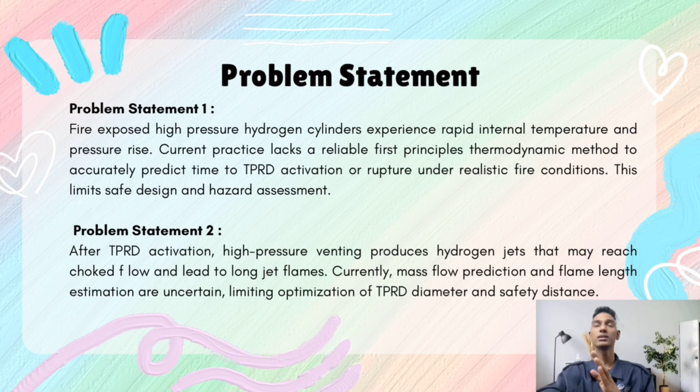After TPRD activation, hydrogen is released at high pressure, forming high velocity jets that may reach choked flow condition and produce long jet flames. At present, mass flow rate and flame length predictions are uncertain, limiting optimization of TPRD outlet size and also safety distance.

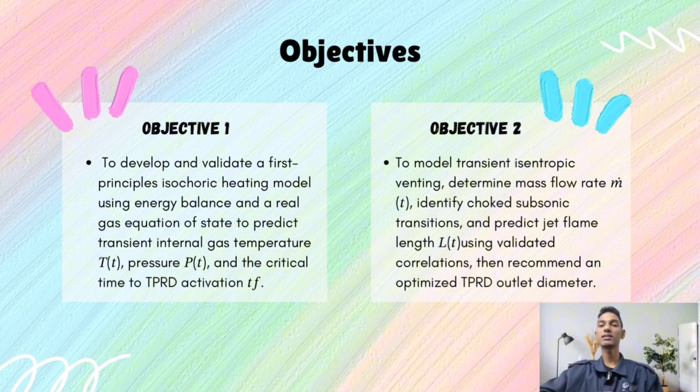Okay, now we move to the objective. This study has two main objectives. First, to develop and validate a first principle isochoric heating model using energy balance and also a real gas equation of state to predict temperature, pressure and also the time to TPRD activation.

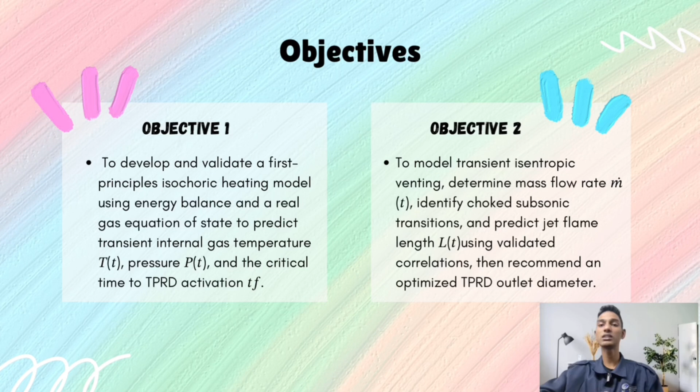The second is to model post TPRD venting as transient isentropic real gas flow in order to determine the mass flow rate, flow regime, jet flame length and to recommend and optimize TPRD outlet diameter.

The scope of this study focuses on hydrogen stored in type 3 composite cylinder under localized and fully engulfing fire condition. So, before TPRD activation, the cylinder is modeled as sealed rigid vessel using isochoric heating with the van der Waals equation of state. After activation, hydrogen release is modeled as transient isentropic flow, including choked and subsonic regimes.

Model validation is performed using experimental fire and blowdown data from the literature, and the main outputs are temperature, pressure, time and mass flow rate and also jet flame length.

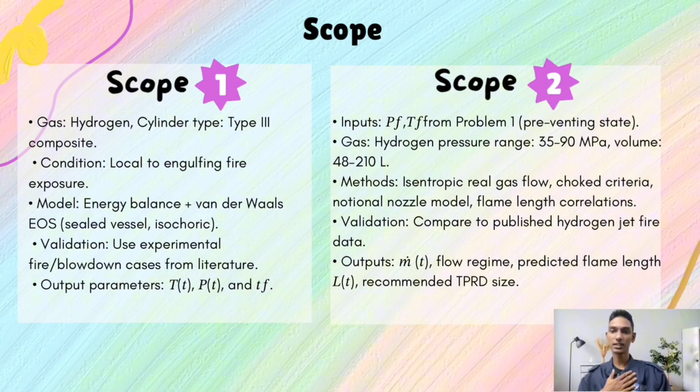Today I will be explaining about the literature review. So this literature review focuses on the behavior of high pressure hydrogen cylinders when they are exposed to a fire. This topic is important because hydrogen is increasingly used in energy systems and transportation where fire safety is a major concern. So when a hydrogen cylinder is exposed to a fire, it heats up very quickly.

As a result, the internal temperature and pressure increase. This can lead to the activation of the thermal pressure relief device or TPRD, or in extreme cases, cylinder rupture. Early research mainly studied what happens after the TPRD opens. These studies focus on hydrogen jet flames, measuring flame length, mass flow rate and heat radiation. While this information is useful, these studies did not look at the heating process before venting, so they could not predict when the TPRD would activate.

Later experimental studies improved this understanding by testing real hydrogen cylinders in fire conditions. These experiments measured internal pressure rise, wall temperature, TPRD activation time and flame length. However, the results were limited to specific cases and did not provide a general model that could be applied to different cylinder sizes or fire conditions.

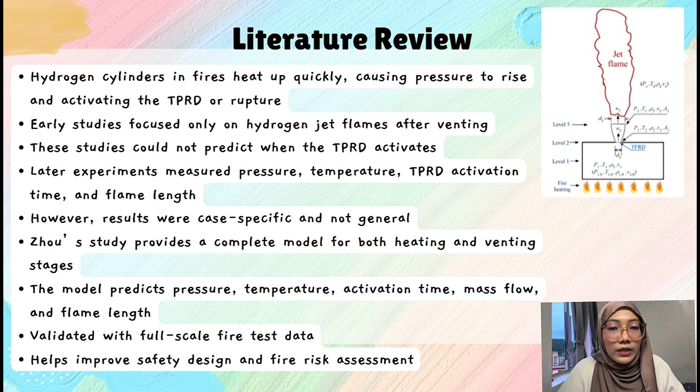Today I'm going to present about research method. This study used a two-part research method to analyze the behavior of a Type 3 hydrogen cylinder exposed to fire, aligned with the study objectives.

The first part examines the sealed heating stage before TPRD activation, while the second part analyzes gas venting and jet flame behavior after release. The modeling is based on first principles thermodynamics and is validated using published fire test experimental data.

The first method focuses on the heating phase before the TPRD activates. During this stage, the cylinder is treated as a sealed system with constant volume, also known as an isochoric process. Heat from the fire increases the internal gas temperature, and this is calculated using an energy balance approach. Because hydrogen is stored at a very high pressure, the van der Waals real gas equation is used instead of the ideal gas law to improve accuracy.

From this model, we can predict how temperature and pressure change with time and determine the exact moment when the TPRD activates. The predicted results are then compared with experimental fire test data, showing good agreement and validating the method. The second method begins once the TPRD opens and hydrogen starts venting from the cylinder. This release is assumed to be an isentropic process, which is appropriate for rapid gas expansion.

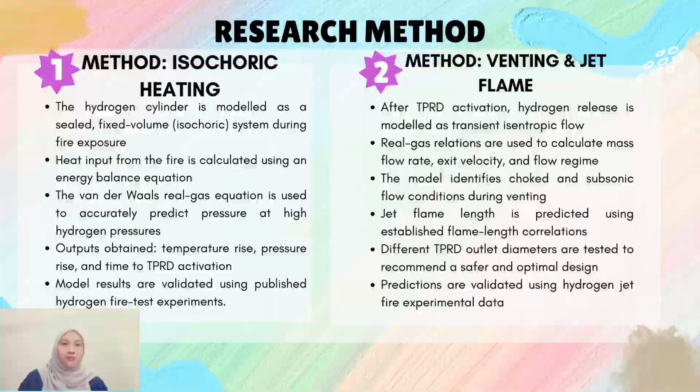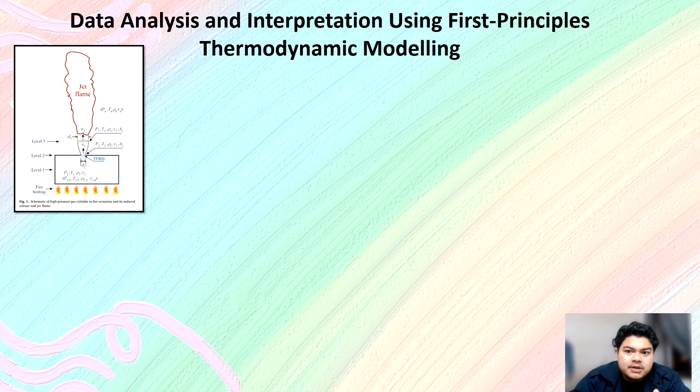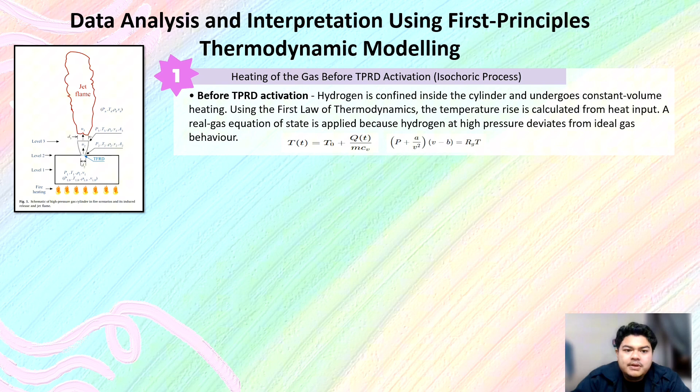Before the TPRD opens, hydrogen is trapped inside the cylinder, so the volume remains constant. Heat from the fire increases the gas temperature and pressure. Using the first law of thermodynamics, this process is modeled as constant volume or isochoric heating. Because hydrogen at high pressure does not behave like an ideal gas, a real gas equation is used. The model shows that pressure rises until it reaches the safety limit, which agrees with experimental results.

Next, after the TPRD opens, hydrogen begins to leak out through a small opening. This leakage is modeled using isentropic flow equations. These equations predict how the mass, pressure and temperature inside the cylinder decrease over time. The predicted blowdown behavior matches well with experimental data.

And finally, after leakage, the leaking hydrogen forms a high-speed jet flame. The flame length depends on the gas velocity and exit conditions. Using the Bradley correlation, the predicted flame length matches the experimental observation. Overall, the results show that first principles thermodynamics can accurately predict hydrogen cylinder behavior and safety performance during fire exposure.

In summary, first principles thermodynamics was used to model the behavior of a high pressure hydrogen cylinder in a fire. The analysis successfully predicted pressurization before TPRD activation, gas leakage after venting, and jet flame formation.

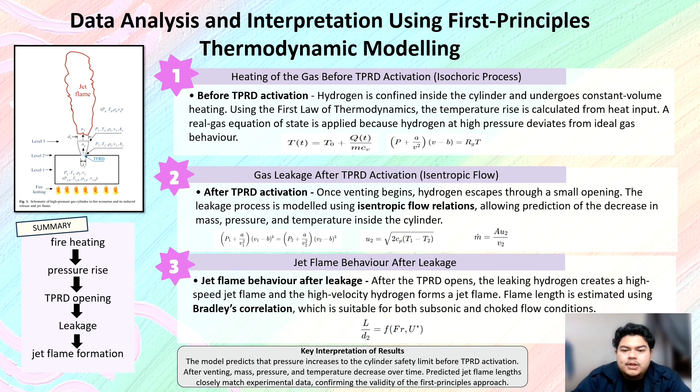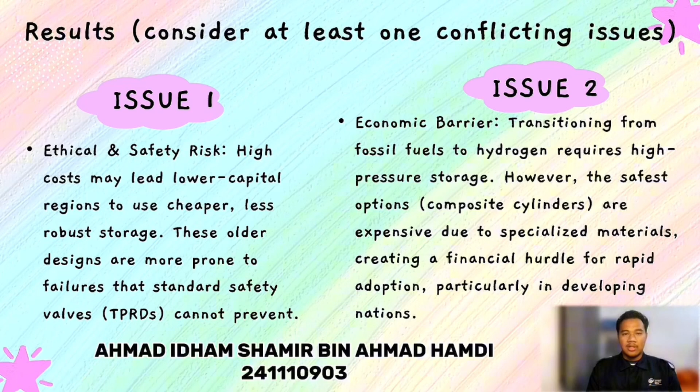241110903. Alright, today I'll present the results. Consider one conflict issue from the jet fire. Issue one is ethical and safety risk. That means a higher cost may lead lower capital regions to use cheaper and less safe storage. The second issue is economic barrier. Transition from fossil fuel to hydrogen requires high pressure storage. However, the safe option is expensive due to specialized material, creating a barrier to rapid adoption.

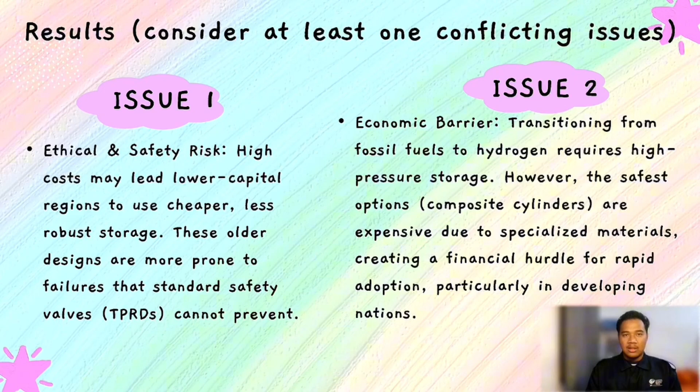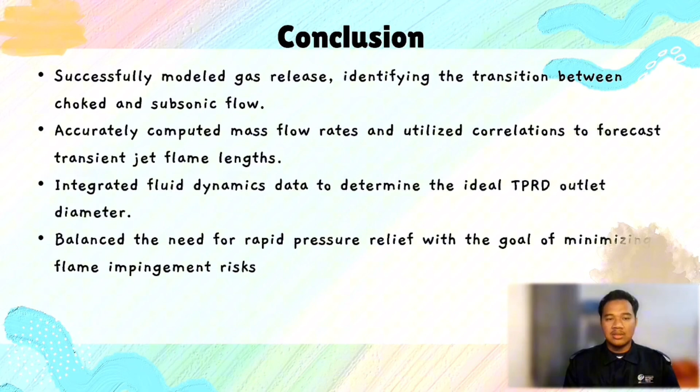And the second part of the presentation is the conclusion. The conclusions related to the objectives are: successfully modeled gas release and identified the transition between choked and subsonic flow. Second, accurately computed mass flow rate and jet flame length. Integrated the fluid dynamics data to determine the ideal TPRD outlet diameter. And last, balanced the two needs of rapid pressure relief with the goal of minimizing flame impingement risk.